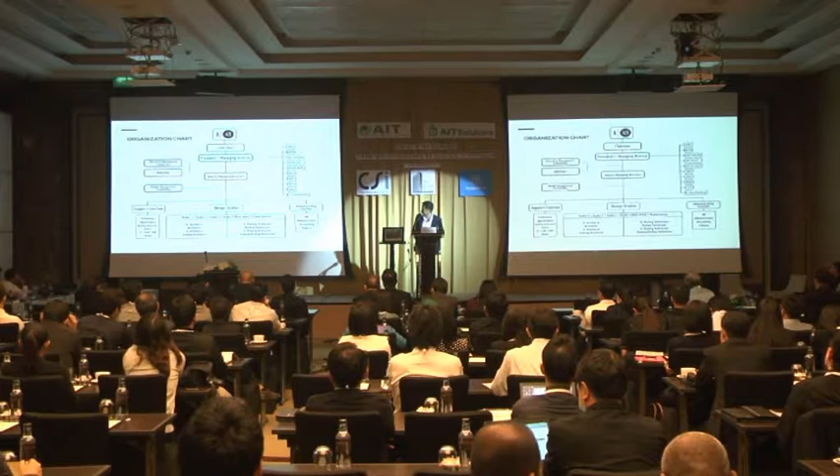We divide the company into 3 studios, which I'll explain later. For example, myself and Kun Somkiat look after studio number 3, Kun Pichai and Kun Nitis look after studio number 2, and Kun Suwat and Kun Krisida look after studio number 1. Within A49, we have approximately 160 people. That's the organization chart, as you can see, that's how we divide the studios.

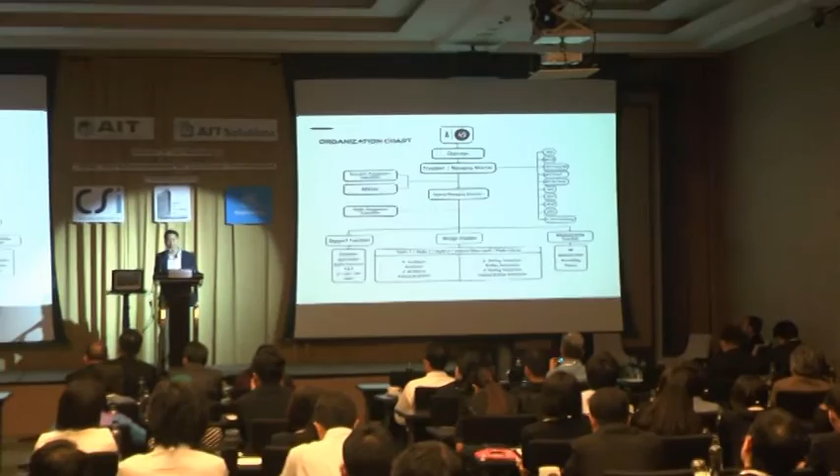Studio 4 is our branch office in Khon Kaen. Apart from Khon Kaen, we also have branch offices in Phuket and Chiang Mai, so we try to cover all the regions of Thailand. Within that, we also have a support department, and on the right-hand side is our affiliated firm, for example AE49 is one of them. So when we take on the scope of works, we work closely with our group companies.

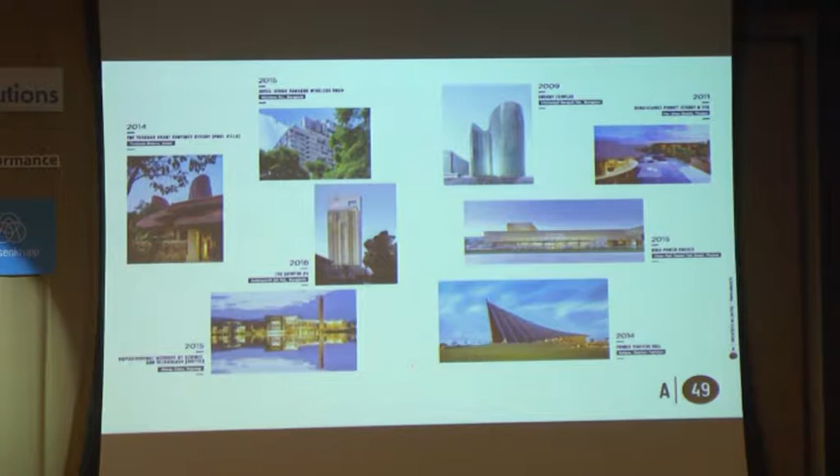And that's the profile of AE49, the structural company. AE49, as I mentioned earlier, is under the leadership of Kun Sayan, the managing director of AE49. I think Kun Sayan has been very instrumental in helping us, the architects, design some of the challenging projects. So these are the typical profiles. I think this is another landmark building on the outskirts, under Mahidol University, which will come into the slides at a later stage.

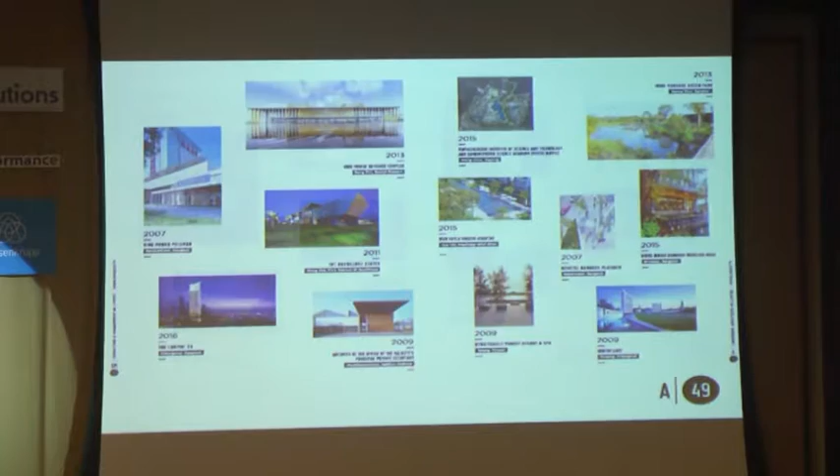Right, so let me start on the topic: architectural innovation and challenges in tall buildings. I think when I received this topic, this agenda, we had to come up with how to define this topic and how to actually talk about and discuss the working approach.

As I said, we prefer to work together as a fully integrated design process from day one, as opposed to the designer just coming up with a vision and passing it on to the engineers. So we took one example of this building: it's a condominium project along Rama 3, near the river.

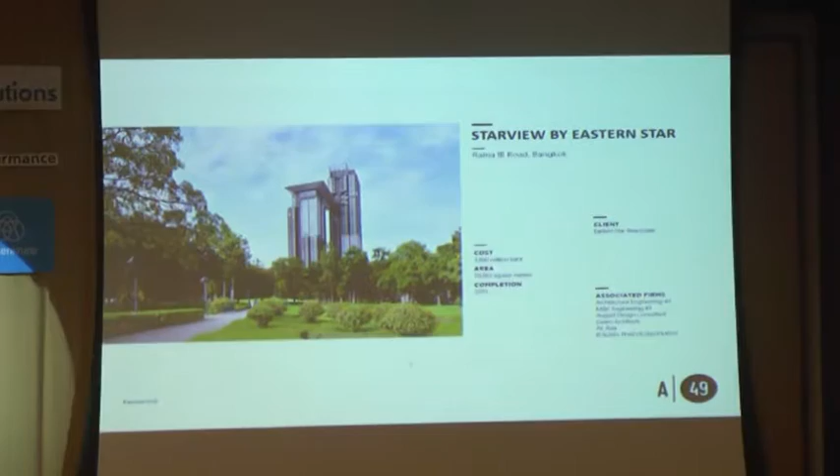It's called Starview. I think many of you who live in Bangkok may have seen that on the way outbound, on the suspension bridge opposite the Kasikorn Bank building. This is one of the early days of a fully integrated design approach and thought process between the designer and the engineers. The reason being is, that's the location.

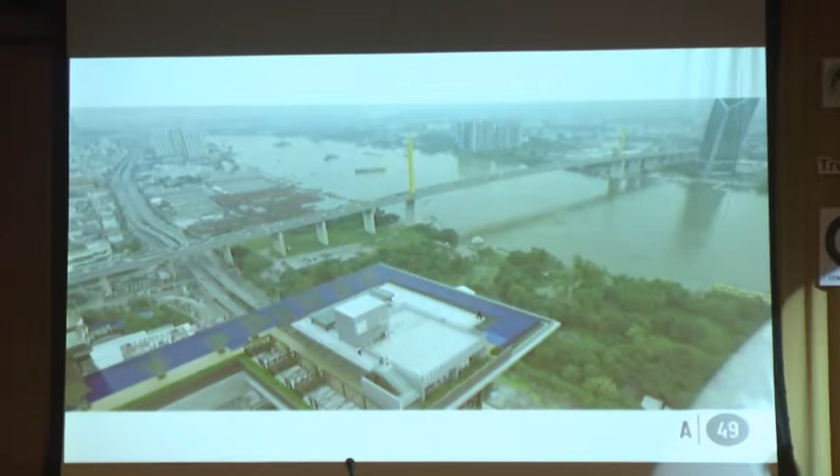This is one of the key challenges where, as a concept, we had to link the common facility together between the two towers. And I think there was so much exercise and thought process with Kun Sayan and the engineers to come up with how do we tackle the lateral movement. Whether we stiffen both towers, or allow them to move independently.

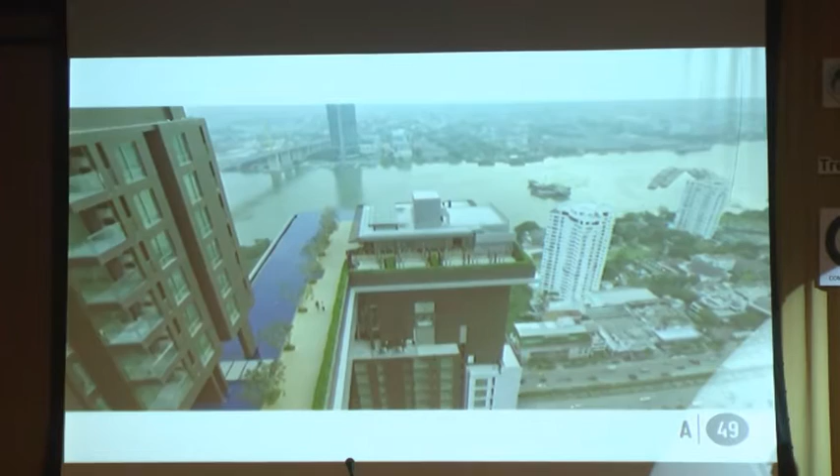And I think the conclusion in the end was that the engineer designed the two towers with us to make it as one, so all the movement becomes one. So therefore, this bridge link is very stiff and becomes the connecting joint between the two towers. So all the movement will move together. This is to avoid the cracks and any big movement on the bridge.

Okay, and this is the tip on the ground floor plan. So that's Tower A and that's Tower B, that's the parking podium. Another thing we designed with the engineers from day one is we try to avoid the tower imposing on top of the podium, because you normally end up with a big transfer. So if you can separate the parking footprint out, you get a very standalone structure, free of interference, coming all the way down to the ground without any transfer. And it has also proven that the efficiency of the parking is actually better because you have no interference from other structure in between.

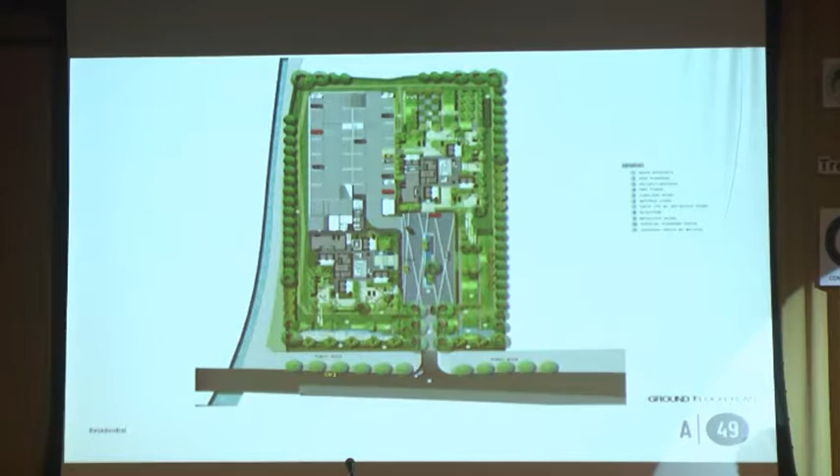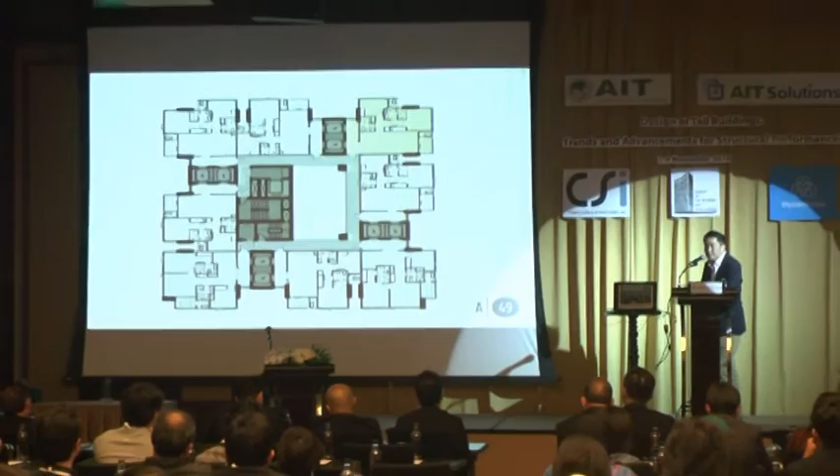And the columns become secondary. So with this footprint, you basically have 1, 2, 3, 4, 5 primary cores with columns to support. So the way of thinking is different, because in the conventional way, we would have the center core packed in the center with columns along the perimeter. Most of the time, in my experience, when you have that system, it is very good because you have a center core, but the columns along the perimeter tend to be very, very big for a 50-story tower.

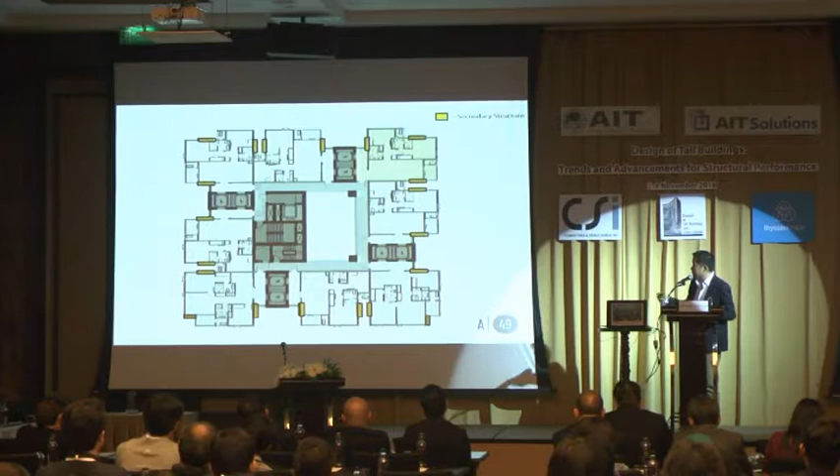So I think this helps to a degree. But when we decided to take the engineering approach as the design concept, it also led to a new way of architectural design. So we came up with the private lift concept, where we use that lift core as the structure, and then deliver both sides to the units. So all the units on this development have private lift concept access to the foyer, to the room.

This also gives you the resistance to the horizontal lateral load, because you begin to have the core on 4 directions to support.

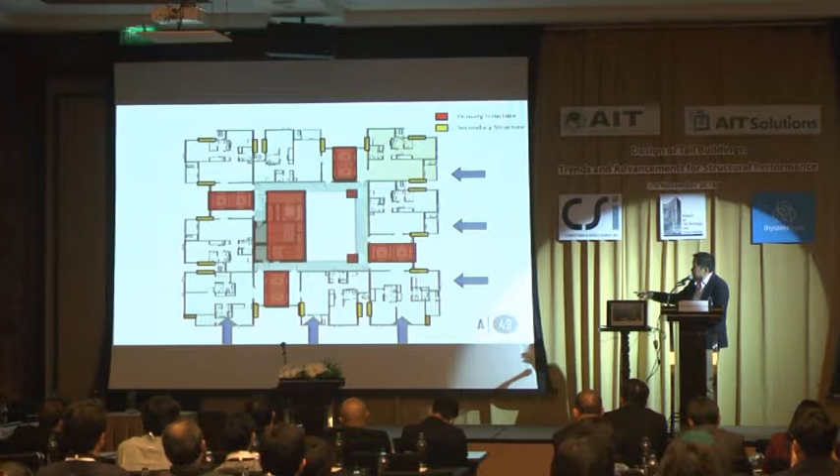And this is on the facility floor, where you link the two towers with this long bridge of 80 meters, swimming pool long, and this is made by steel structure, prefab, and lifted up piece by piece.

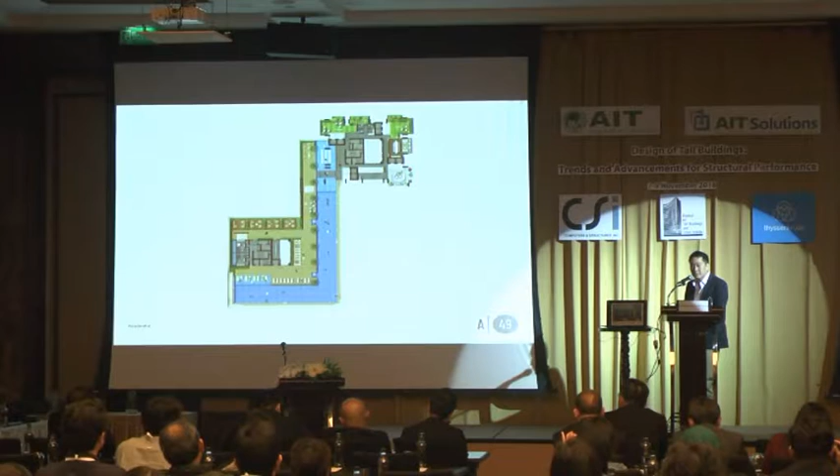This is the facility floor, and that's the section. As you can see, it is linked on floor 45, and this is to link the two towers together to make sure that all the movement is considered as one.

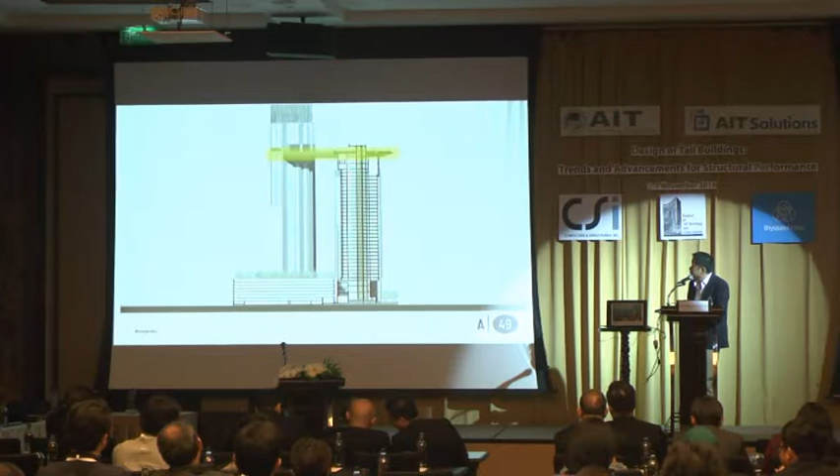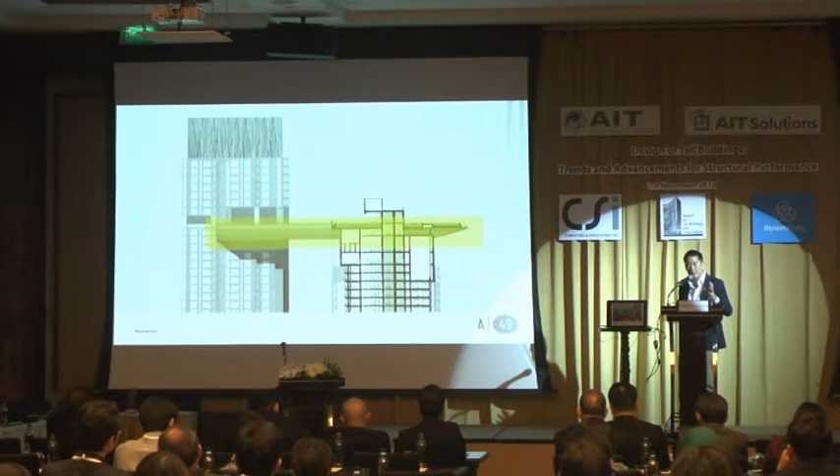I have a little video clip to show you on the steel structure. The steel structure itself is 4 meters deep, and it has catwalk access inside for maintenance and sprinklers for safety. That's the gap of the steel structure that we worked out with all the services and M&E rooms below.

The construction cost of the bridge structure itself came up to around 150 million just for the bridge.

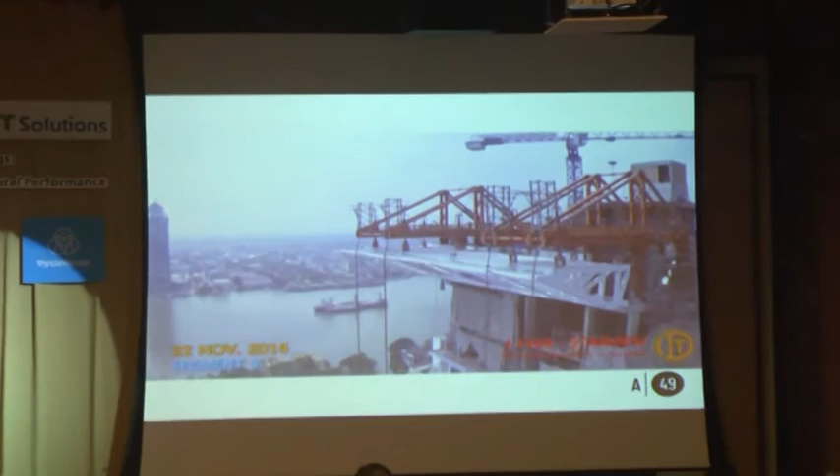Every 1 hour it lifts something like 30 centimeters, 300 millimeters. So within a day, you can't even lift it up to the top yet because of the weight. But the good thing is the whole piece is prefab from outside and gets delivered on site and lifted up piece by piece. So in total, there were 5 pieces assembled on the top.

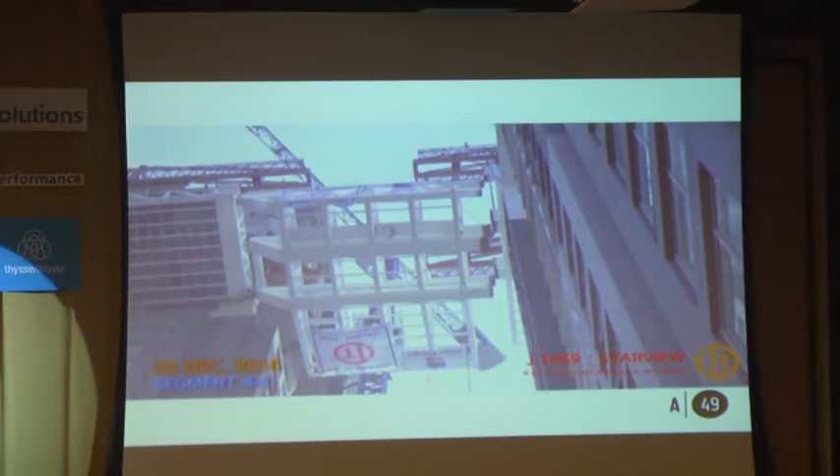The contractor, I have to say, give applause to Italian Thai. I think they were very good at this. But they had to collaborate with a French contracting company also on this particular bridge structure.

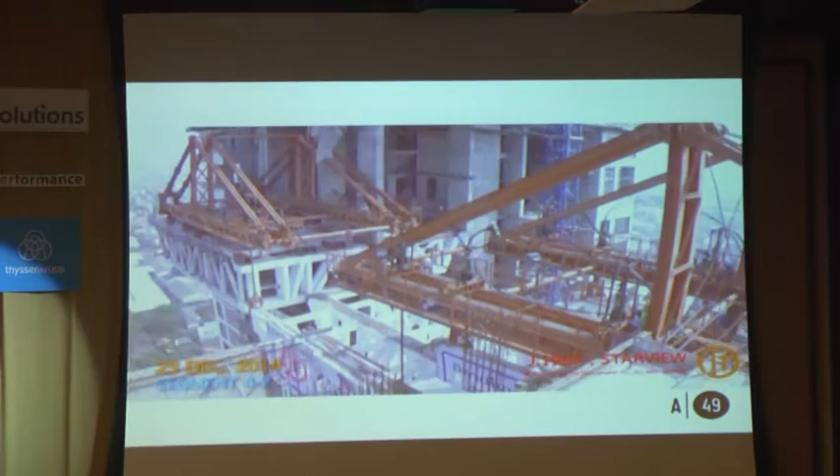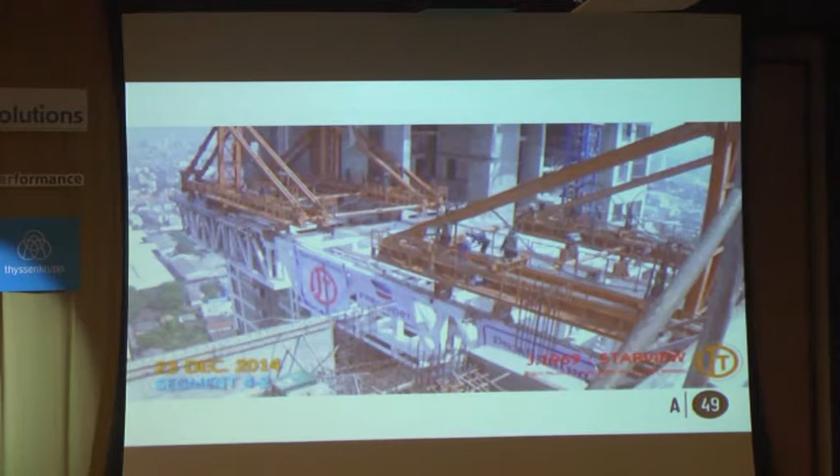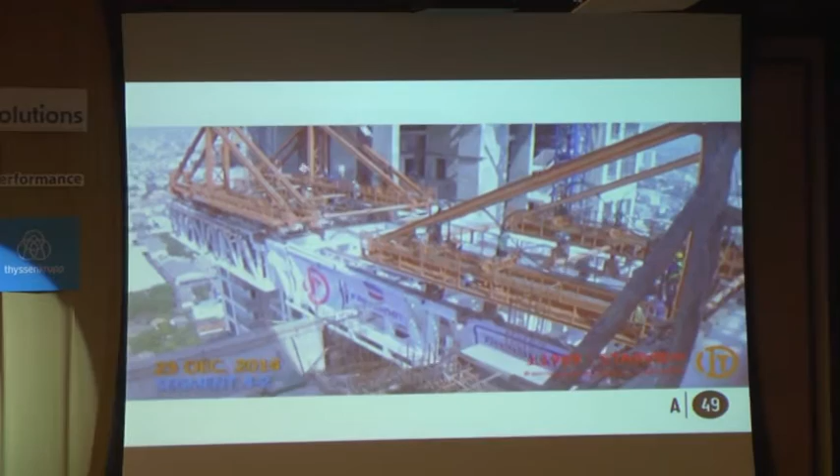And it was quite challenging because we also went and witnessed the lifting process. And the most amazing thing is when they lifted up, the tolerance was less than 25 millimeters of alignment. And what we were informed by Italian Thai is they use the same technology as how they build a long suspension bridge on this construction method.

And these are the images of the completed project, which has been completed for almost a year now.

In addition to the collaboration with engineers from day one, we also did the wind tunnel test in Australia in order to make sure that the structure, the pedestrian wind load can be withstood and resisted, and how we designed together with the engineers. It was proven through the wind tunnel process that the structural design is almost 8 million baht more efficient than without wind tunnel design, because from the wind tunnel report, Kun Sayan was able to redesign and value engineer the structural design a lot more efficiently.

One thing, it was our first learning curve also. We also forgot - we fill the water, but the building is so high, so the water just gets swept away by the wind. So you never get the water right to the edge in the end. The next project, we'll do some windbreaker to make sure the water maintains the same level.

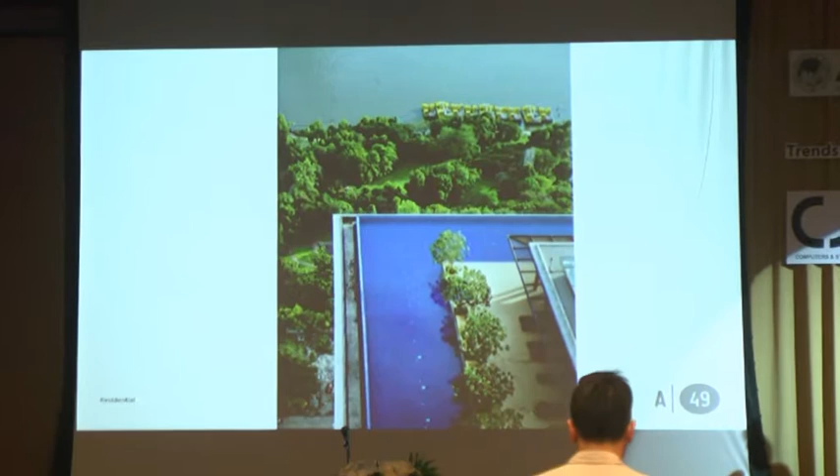But I think it's still considered one of the most challenging projects that we ever commissioned to do. And I think this is something that I threw up as an agenda for discussion today.

What do architects expect from engineers?

I think that's the key, because from what I have worked in Thailand, the process is normally the designer comes up with something, and then the engineer just comes up and tries to work it out, and then you talk about whether it can be done, and you resolve it with technology. But I think Stadio had proven a different approach of working. If you actually work together from day one, the engineer no longer becomes just an engineer, it actually becomes the architect, and the architect also becomes the engineer, you can achieve a better result.

This is the experience I had working with Buro Happold in London many years ago, and I was so impressed. I had just graduated and had a building to do. I came up with a design concept with some structural concept also, and passed it on to Buro Happold London. A week later, they came back with 3 options beyond what I designed, what I came up with. Their options came with structural solutions as well as structural aesthetics. So if I went with one approach, they came back with more options which were structurally sound as well as aesthetically pleasant looking. And then we developed from their options also.

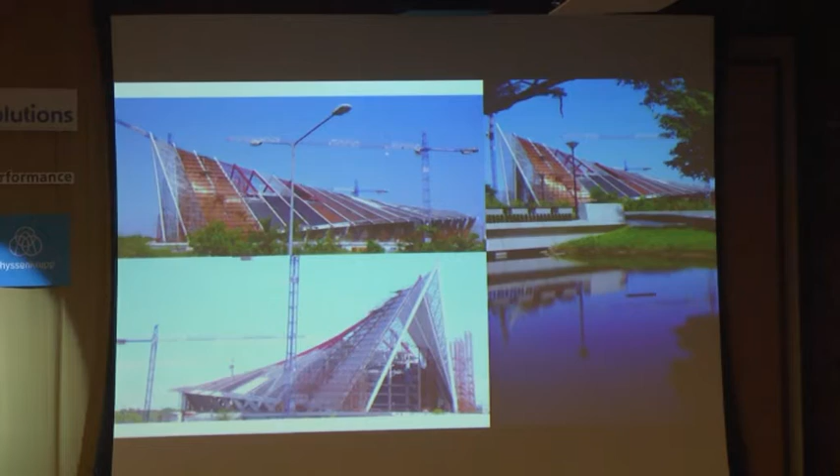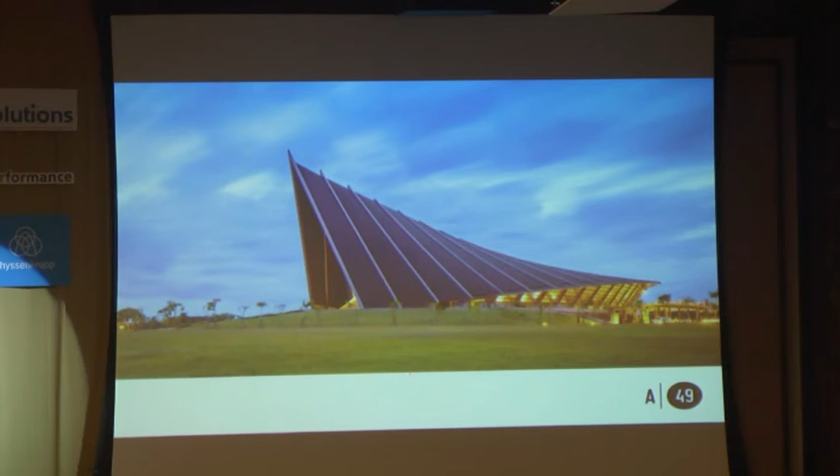So I think this is part of the thought process, when we collaborated with the engineer from day one, the engineer actually had great input to help the architect deliver the aesthetic as well. And this is the result of what has been designed as a fully integrated approach between engineers and the architect. This is the first building of its kind, holding 2,000 seats at Mahidol University. That's an A-shaped structure, as you can see. This is concrete, by the way, and the roof is made from steel.

And I think that's roughly what I have brought in today for discussion. So I hope it becomes useful to a degree.